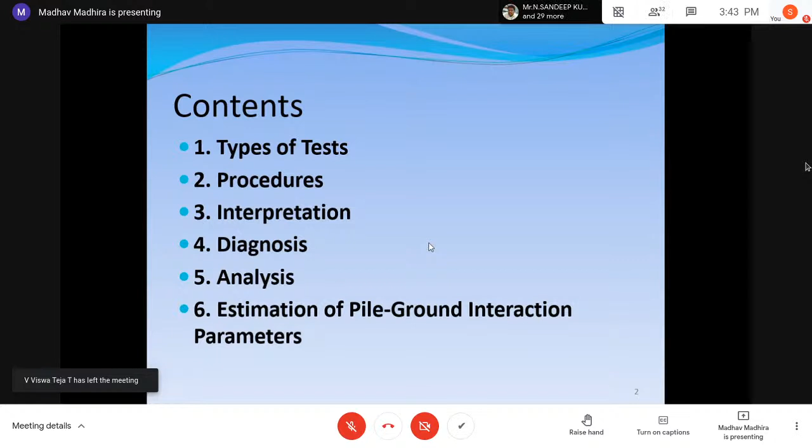What are the types of tests we have? What are the procedures? More importantly, interpretation - following that you can diagnose what's happening in terms of the response of the pile from the load settlement data. Then we can analyze and get back some ground interaction parameters too. There's a variety of things you can get - don't think pile load test is simply to confirm allowable pile load. It's not fully complete in that respect. We'll try to cover many of these aspects, and I'd like you to share anything you want. At the end of the presentation, send a note or message and we can reply.

The kind of tests we do on a vertical pile are axial compression, which is the most common one, wherein you would like to know what is the maximum load it can take and what will be the allowable settlement at the usual working load condition.

Then, of course, you do the design. Basically, why we need the test is because when you design a pile, for example even 0.6 meter, 12 to 14 meters long, it goes through several soil strata, and we hardly know any information. Maybe we'll have some SPT N values, if you're very good you can probably have static cone QC, and some people try to get the so-called undisturbed sample. We know in India our sampling is not all that perfect, and so we end up getting some very unrepresentative values.

So based on that, we try to design saying that the allowable load for the pile is 90 tons, or 900 kN, or 800 kN. For us to accept the design, you need to verify, and that is why we go through this axial compression test.

Similarly, when we have a building or a tower, instead of compression you may have a pull-out, which means because of either wind load or lateral loads or whatever may be the reason, could be uneven ones, the pile can be subjected to an uplift or upward force. We call it pull-out load.

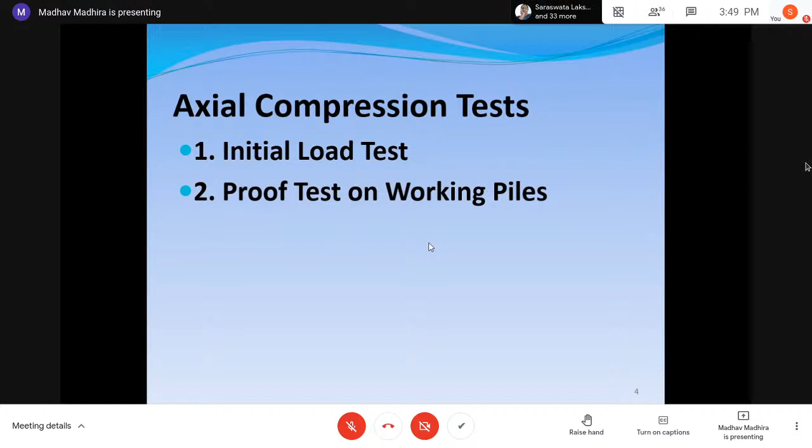So what we do is in these 50, 100, 200 piles, we choose 1, 2 or 3 working piles and test them for 1.5 times the design load. That will give you confidence that we are going to get a safe design, which is rational and appropriate for our project, because you don't want any pile to fail. Please remember, piles are very expensive. I believe the cost is somewhere around 1,000 to 10,000 rupees per meter. So when you're investing so much money in the foundation, and the performance of the superstructure depends on the performance of the piles, you better invest some money in making sure the whole thing will work well.

Then how do we load these piles in terms of compression? What we have is what they call kentledge, which is nothing but dead load. You make sure all the load is initially placed and transferred away from the pile, and you can then take the reaction through a jack from the kentledge. The second alternative would be you can drive piles around and use them to take reaction. Sometimes we do it out of the existing ones in a big pile group, but for an initial pile load test, I don't think it will be possible because we don't have too many piles around to take reaction from there.

The third possibility would be you can drive anchors into the ground, which means you have to go fairly deep, maybe 10, 15, 20, 30 meters, so that the anchor gives you the load from which you can take the reaction. Out of these, the most common ones are the kentledge and reaction piles. Occasionally, you do get the anchors.

Then in terms of the test, we do two types. Basically, what's called a maintained load test, which means the load is kept for some time. There are two ways in which you can keep the load: slow test, which means you wait for the deformations to become reasonably constant over a period of time, maybe half an hour, 45 minutes, 1 hour, etc., and then go to the next stage. Some people say they can't wait for it, so then they do a quick maintained load test, where the load is kept only for a short period of 10, 15 minutes, and then the next load is applied. The interpretation in each case is very different, and let me tell you, the deformations are more in case it's a slow maintained load test.

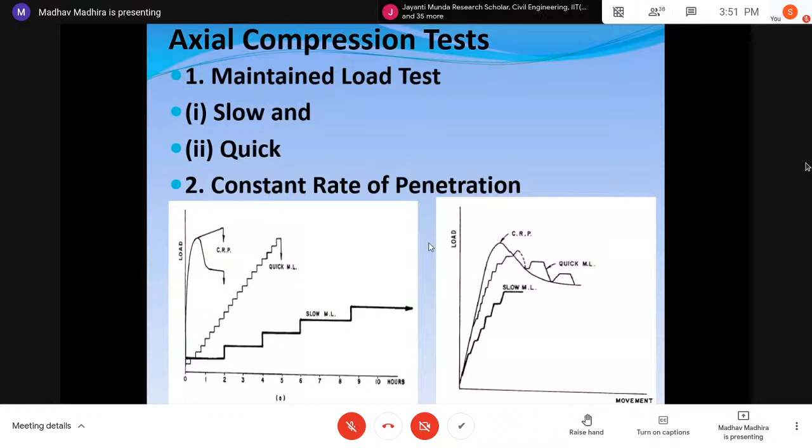Constant rate of penetration is where you push the pile with some kind of mechanism at a rate of, say, a few millimeters per minute. Again, this is not a very common thing, but some people have tried it. Basically, I would say most of our tests are slow maintained load tests. These are the kind of schematics you have for the types of loading.

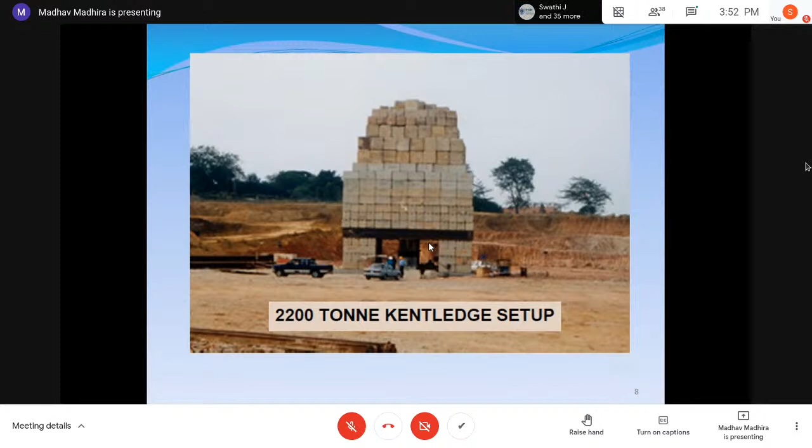Let me tell you, it's very, very expensive to do a static pile load test. It may run into a few hundred thousand rupees, etc. This is one particular case where they had a 2,200 ton kentledge setup, and you can see the blocks, cement concrete blocks, they had to pile them up so high to get the required load. Obviously, in this case, the pile capacity would be definitely 300 to 500 tons at least, so that they can get it.

What we do in India is, of course, not always getting the concrete blocks. We sometimes use sandbags, which you have to pile up. Because each bag is hardly about 50 kilos, you need a large number. There are instances where we used something like 1,000 to 1,500 sandbags, and that led to problems because the height of the loading increases, and with increased height, the chance of instability is very high too. Taking them up is not easy, so you have to do all kinds of things.

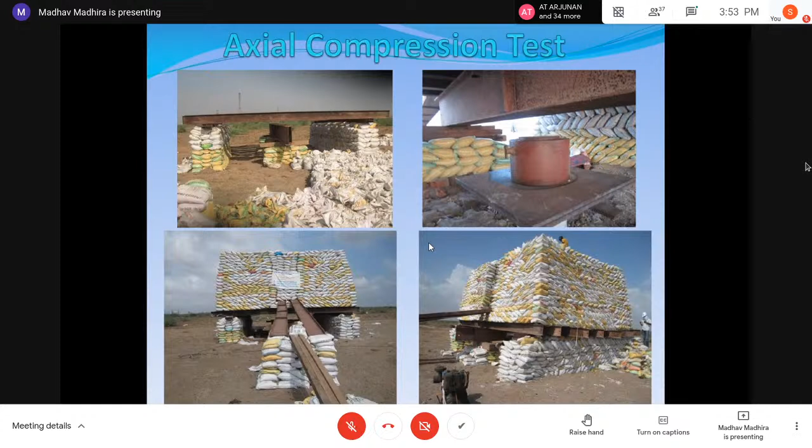I don't know whether I should say this, but in my experience, please pardon me in case I violate some professional norm: some contractors do preloading the previous night if you are not careful. So what you see on the day of testing is a preloaded pile. Don't leave the jack without attention. I want to warn you that this is very important. Whenever we did pile load tests in IIT Kanpur, we had our own watchman there to make sure there was no loading done in the night. I know one of my colleagues who left a company because he was asked to do this. He said, I won't do it. And they blamed him, saying his load tests were giving very small allowable loads, whereas someone else was giving much larger values, the reason being the other person was loading it the previous night.

Then we had to measure the displacement, the jack of course gives the load. When measuring displacement, please note that the support system for the dial gauge has to be kept fairly far, otherwise the effect of the loading on the pile will cause displacement of the support for the dial gauges too. I'll show you some more pictures of this.

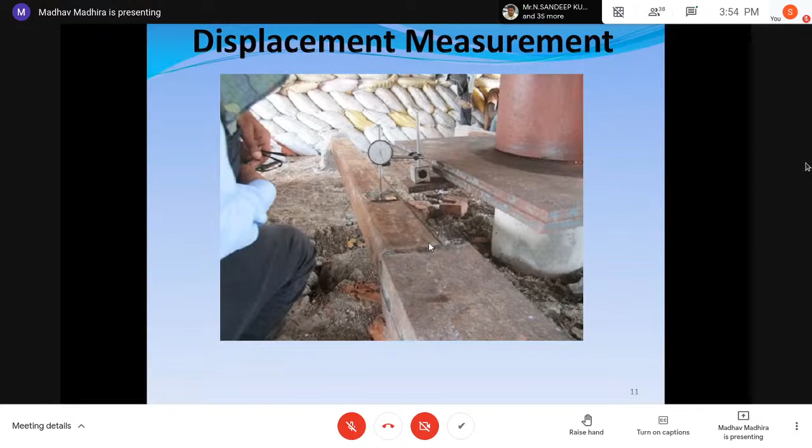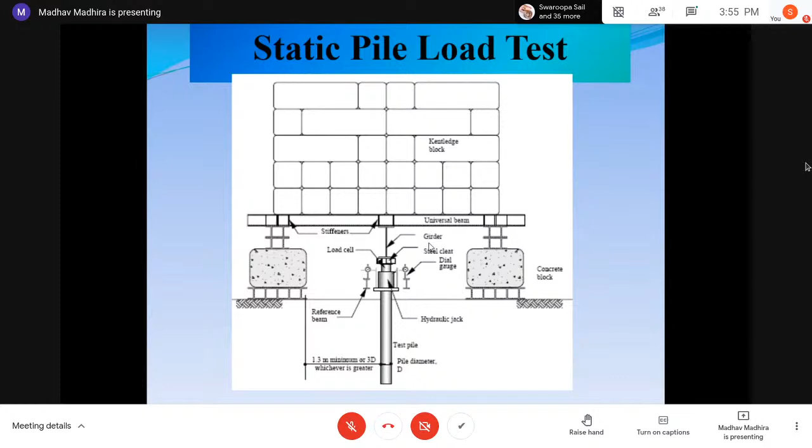Don't take just one reading, you should have at least two, so that in case the pile has a differential movement from east to west or north to south, you'll be able to find that out. One dial gauge, in my opinion, is not good enough. You need a minimum of two dial gauges.

This is the pile load test again. Basically you can see very heavy sections are needed: a 600 mm diameter pile, a jack with 350 ramp, and two dial gauges on either side.

Again, the details: you can measure the load through either a proving ring or one of those load cells, and you get the load from there, while the dial gauges give you the displacement.

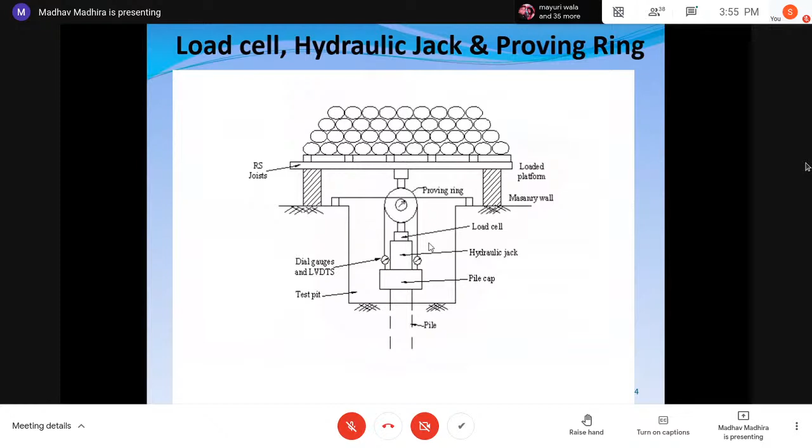This is another schematic, and the jack is loaded by pumping. I would recommend this pump be fairly far from the pile, because I'll show you another reason why instability may lead to problems. If you have a setup where you can put the jack and pump a little far away, it will always be good for you.

This is what I wanted to say: if you want good measurement, please move the support system far away so the dial gauges are not affected. Fortunately, nowadays you can use a total station rather than a dial gauge to measure displacements, and that would be one of the best ways to circumvent the problem of support settlement.

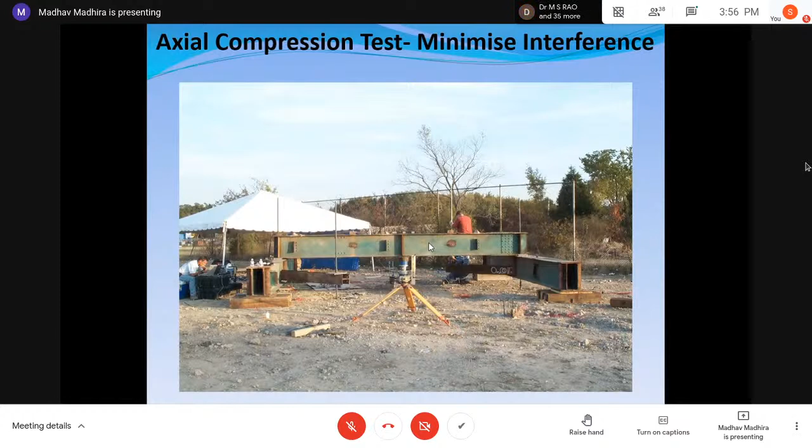If you look at the shaft resistance, it is mobilized at a very small displacement, hardly something like 5 millimeters is enough for the full shaft resistance to be mobilized, whereas the base resistance needs a large displacement, maybe of the order of 10 to 20% of the diameter of the pile. Keep this in mind, because when I talk about interpretation, this will be very useful.

The shaft resistance sometimes, in case of very dense sand, shows a reduction because the ultimate load, or peak load, may be more than the residual one. So you have to be careful with that when you are testing, and when you see a kink in the curve, you realize what's happening. That's how I want you to look at the load displacement graph.

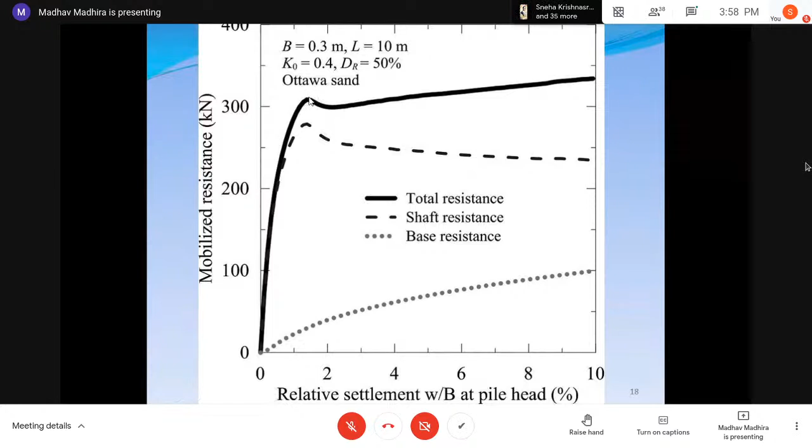Usually what we do is we don't load directly, we use cyclic loading. Let's say I apply the load first to about 200, 300 tons, unload it, go for the next cycle which may be 500, 600 tons, unload it, and then go for the final cycle 3 where you find the required ultimate load. In this particular case, cycle 3 has gone up to 800 tons.

When you look at the displacements on the time-settlement curve, whatever displacement occurs becomes constant under the first cycle. When you unload, we don't get back all the settlement that went in, the rebound is smaller. Under the first cycle, the rebound is fairly significant, with probably very little plastic deformation, about 10%. But under cycle 2 and cycle 3 with high loads, the rebounds are much smaller, which tells you the behavior is going into more plastic state. The pile-soil interaction moves into the elastoplastic range, and that tells you how the ground is behaving.

This is another thing you need to interpret when you are looking at the pile load test. So this is how it looks like.

I want you to look at cycle 1, which has given you almost elastic rebound - I wouldn't say elastic, but hardly about 1 millimeter was the permanent settlement. Under cycle 2, the maximum displacement may be about 10 mm, but rebound is only 5 to 6 mm. In cycle 3, the maximum displacement is something like 22 mm, but the rebound is more, about 10 mm. So you can see the behavior of the pile is different under different loads - this is how you can evaluate the elastoplastic nature of the pile.

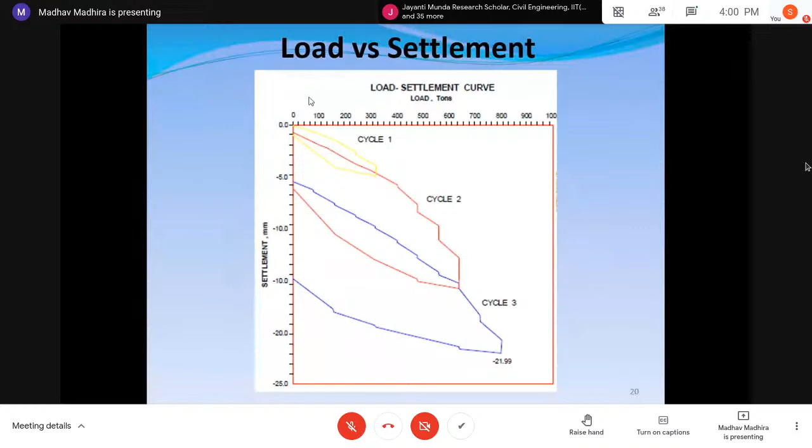We also like to find out if it's possible to measure the load in the pile, so that we can know how the load is getting transmitted to the bottom. I'll come back to this in more detail later, but in refined testing where people want to know the load transfer, all you need to do is provide strain gauges embedded in the pile itself. From the strain gauge I can get the strain, from the strain I can get the stress, and from there the load.

You realize that in all these cases, the shaft load is mobilized first, and the base load is the last to be mobilized. So you can say it's a top-to-bottom load flow - if you think in terms of seepage, the load is the one that is getting transferred slowly to the bottom. You have to see if it's possible to measure this kind of load transfer too.

You can also have a lot of instrumentation and find out, if possible, the toe displacement too. It's a very simple device - all you have to do is provide another telltale at the bottom. Some agencies measure not only the top displacement but also the bottom displacement through another device, so you know how much punching takes place at the toe into the base layers. This is another way to get more understanding of pile behavior.

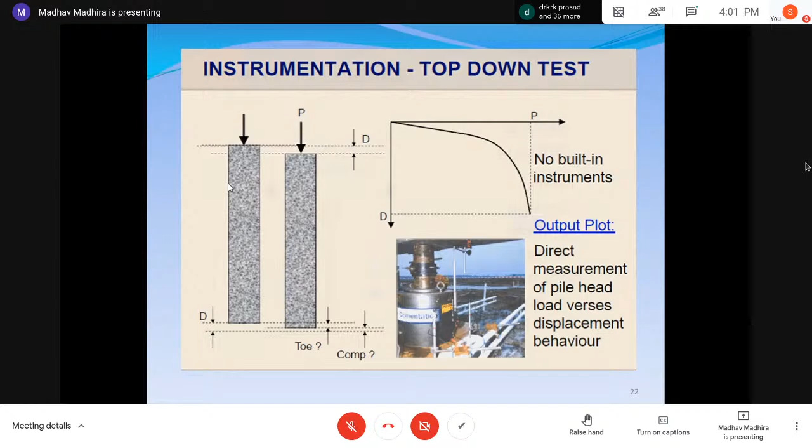I want you to now realize the interaction between dead load transfer through the Kentledge. Suppose if I have the pedestals close to the pile and the Kentledge is loaded as it is, the surface footings through which the Kentledge dead load is transferring 500, 600 tons to the soil means the soil below the foundation footings is going down, which will try to subject the pile to down drag. I want you to understand this because the implications of testing are important.

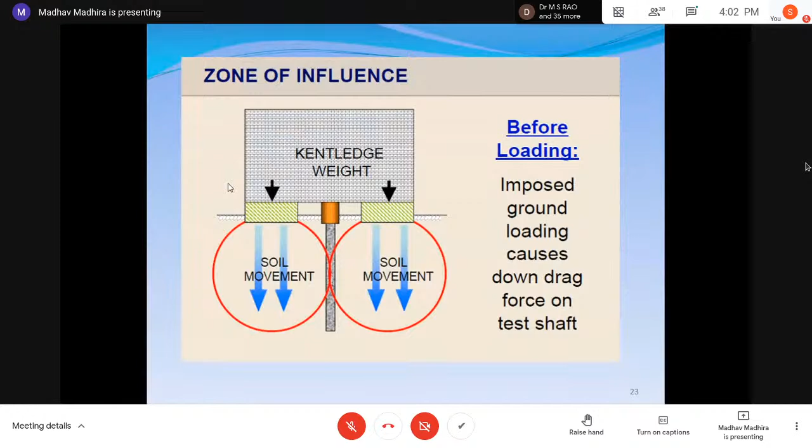If the spacing is large, this down drag will be less. But if the spacing between the two footings on the surface is small, this is what happens. You can see the pile is initially, even before you load it, subjected to down drag because the soil around the pile is trying to go down on either side.

Now, during loading, what's happening is you're pushing the pile. So the pile is trying to go down and the load is being transferred to the pile. So the load on the footings is reduced, and the soil tries to move up. We need to analyze again, in case of interference, what is happening to the pile. So whatever you think you're testing may not be true. It's because of a combination of down drag before loading and the reverse of that during loading of the pile.

So please remember, you have to be very careful to keep these kentledge supports very far from the pile. The reaction piles are put in all around, and then you can see the piles in between these four stanchions, and from there you connect a girder and take it.

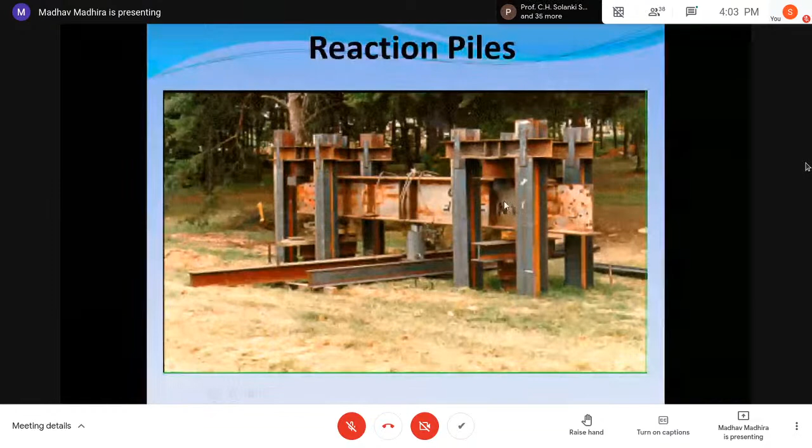We also have a very similar problem with reaction piles too. So when I have these reaction piles, if they're far, there's no problem. If they're close, we have a problem. This is schematic basically. I have the two piles far away, at least 2 to 3 meters, or at minimum at least 3 diameters away. That should be the minimum criterion. And then you install the piles on either side from which you can take reaction.

When I take compression for the pile here, the other two piles will be subjected to tension or pull-out. That's why we call them reaction piles. So please note that the minimum distance is at least 2 meters or 3 diameters, preferably both.

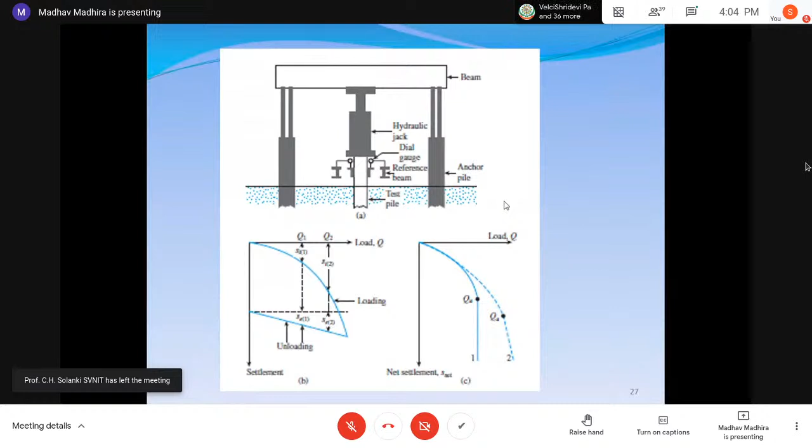And this is how you can say, in terms of the load displacement response, very similar to kentledge 1, 2. You have a hydraulic jack which is taking reaction. We have a reference beam from which we measure displacements too. And this is what I would like you to again look at in terms of interaction.

If the piles are too close, the zone of interaction with the anchor piles or reaction piles will affect the performance of the pile itself. So your test pile may be subjected to the effect of the adjacent piles. Whenever we do the group analysis, we have to consider this. One pile is in compression, the other two are in tension. So you have to analyze, assuming how much of load and displacement are affected by this.

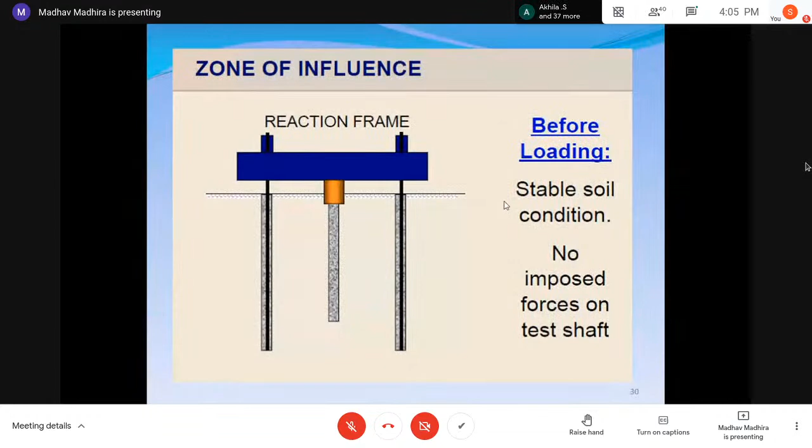So this is the same thing as earlier. Before loading, there's no imposed load on the test shaft. But once you do the test reaction, please look at the soil movements. The reaction piles will try to move up, which means they try to pull the pile up. So the net movement you get will be due to compression under the load of the pile and possible upward drag force from the surrounding shaft.

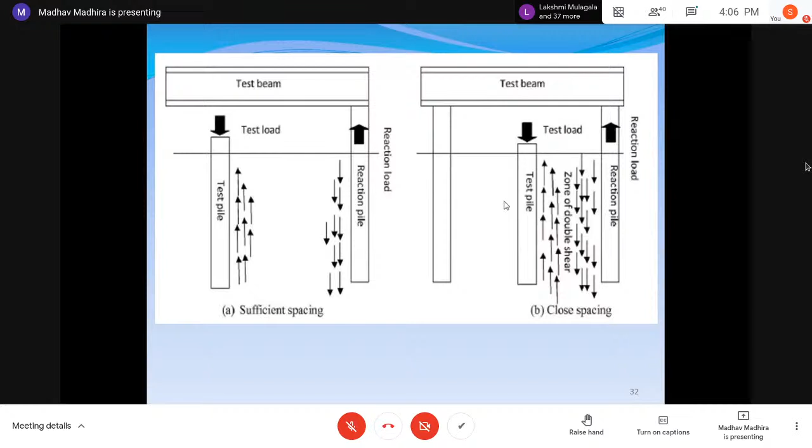This is schematic. If I have sufficient distance between the test pile and the reaction pile, I don't expect any interaction or interference. But if you have close spacing, you can see the pull-out effect that you get on the test pile. The reaction pile is trying to move up, so the soil is trying to move it down, pull it down, and Newton's third law tells you the test pile is subjected to soil which is trying to move up. So please remember, it's not that simple to do this.

Now, there is another very interesting test which was developed recently. They were saying, why should I test the whole depth of the soft soil? If there is a bearing stratum at some stage, can I do a sort of plug test? So what they recommend is, instead of having a pile which will run into the soft stratum that hardly gives you any shaft resistance, they put in a collar with a casing, and then they grout a plug in the bearing stratum.

So this I can call a partial or short length pile, which is only in the bearing stratum. I'm not interested in the response of the soft strata, which is not going to cause any load, which will not take any load. So please remember, this is another alternative you can have in case you want to concentrate only on the bearing stratum.

This is valid particularly in our many coastal areas. The top 5-10 meters is extremely soft. The undrained strength of the soil is maybe 10 to 15 kPa, whereas most of the load I get is from the bearing stratum, which is probably 10, 12, 13 meters. It could be a stiff clay, a dense sand, or whatever combination you have.

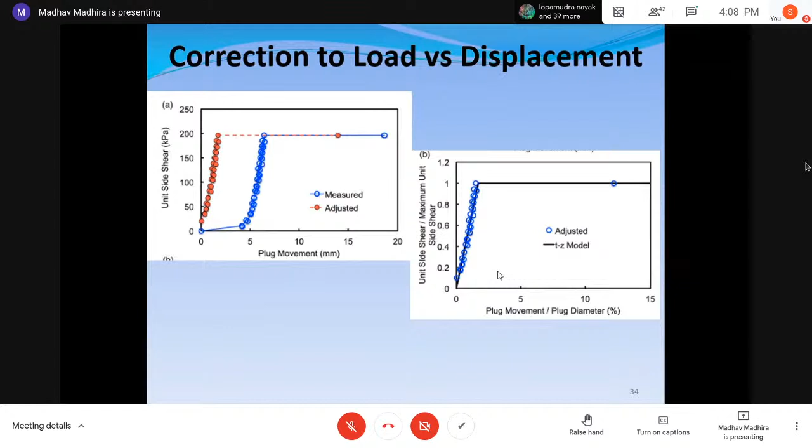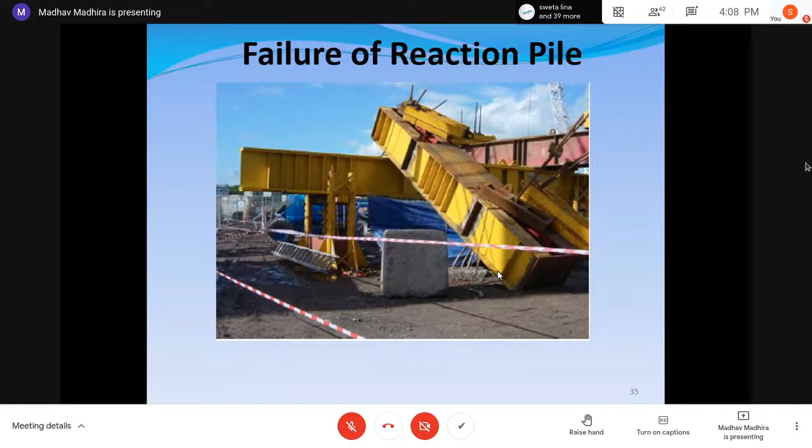Now this is what I wanted to tell you. If you are not very careful with your arrangements, the whole thing may collapse. That is why the jack and the person who is taking the reading should be very far apart. We had 1 or 2 such accidents while I was at IIT Kanpur, so it's not something fictitious.

This is particularly true for Kentledge too. In one particular case, I was there and my lab assistant managed to jump out of it. Because of the very high Kentledge, it becomes very unstable if it is not properly loaded.

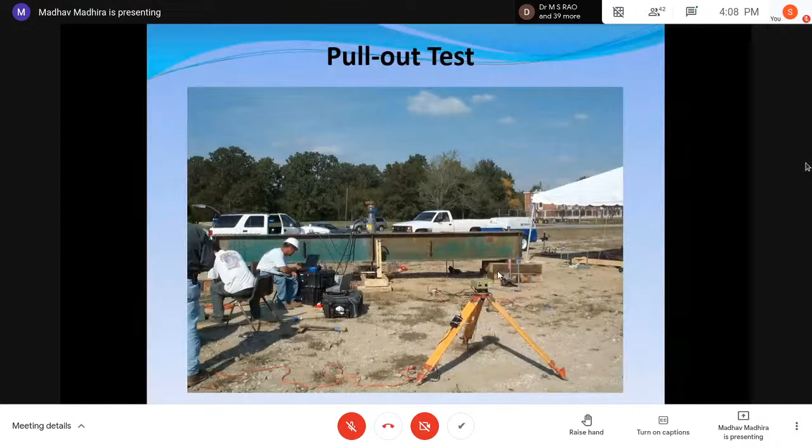When you do a pull-out test, it's much easier because you connect the girder to the adjacent piles and the jack is pulling it out. So the reaction piles are under compression and the test pile is under pull-out. You can see the jack is above the girder and the two strips are going to the pile and attached there. So when the jack is pushing it up, the test pile goes up too. This is how you do the pull-out test.

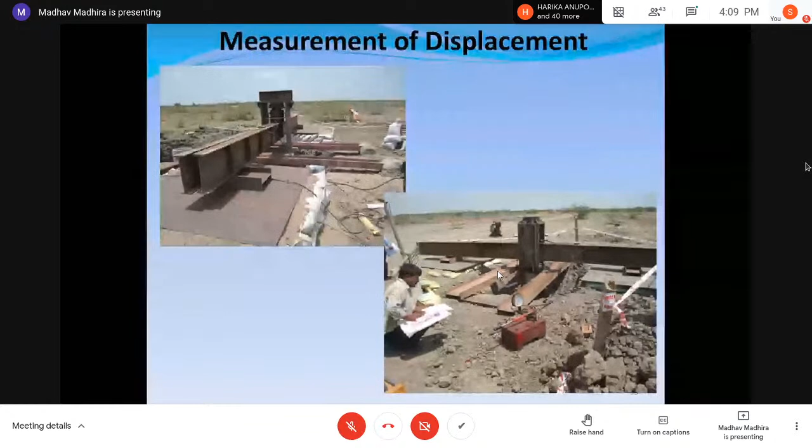When you have a lateral load test, we have a little more complexity. Most of the piles we have, when we test it, we don't have any pile cap. So what we are testing most of the time is a free head pile, which means when you apply the lateral load, the pile head can displace and rotate.

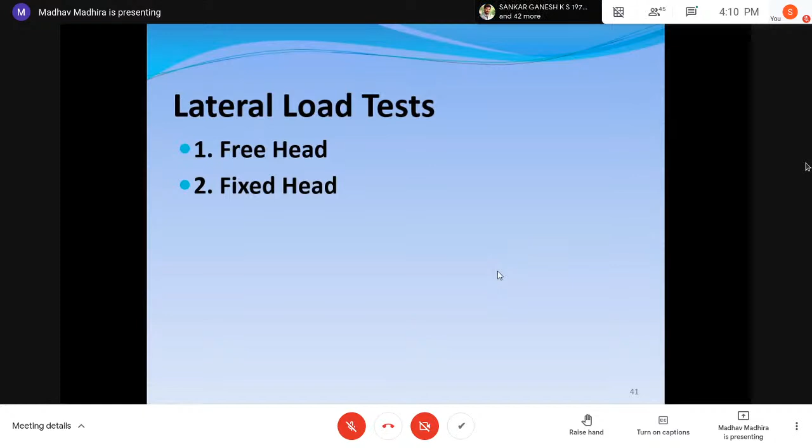Now this is a very strange thing - in all our testing we think free head pile, but in practice there's nothing like a free head pile. Most piles are embedded in a pile cap and pile raft, which means the head of the pile is fixed. The response of the free head pile is different from the fixed head pile. So in case you want to improve it, you have to cast the pile in a huge concrete block to make it fixed head. So when you do the lateral test, be careful how you get the kind of thing.

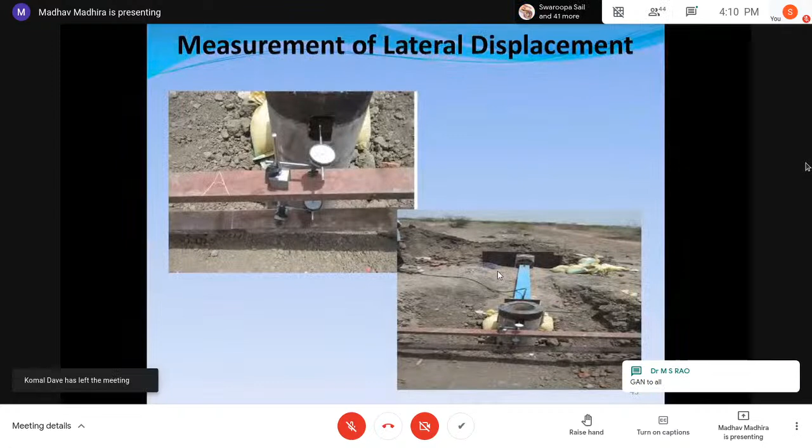Lateral load testing is relatively easy in one respect - I don't need a dead load, I can use the neighboring pile itself. I take a reaction from the adjacent pile, put the load, and take the reading. This is how we measure the displacement laterally - put the dial gauge, and the pile movement can easily be measured.

You can also do a two-way test, in the sense that I can get the response of both piles simultaneously, or I can do a cyclic one, in terms of load-unload, very easily. So the testing for lateral load is much easier. Here you can see they're all free head piles, there's no pile cap. When you interpret and design it, you have to convert the response from a free head pile to that of a fixed head pile.

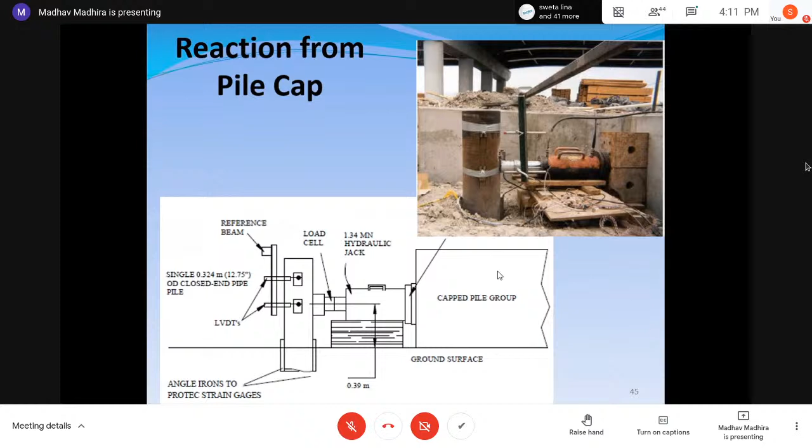So often what we do is either use two piles, or if you have a pile cap, best is to take the reaction from the pile cap itself. The fortunate part is that while the compression load can be of the order of 100, 200, 300 tons, the lateral capacity is smaller, maybe hardly 1/10 of that. So the reaction you need is very, very small, and we can use a pile group which is already existing - from there you take the reaction and get the load tested.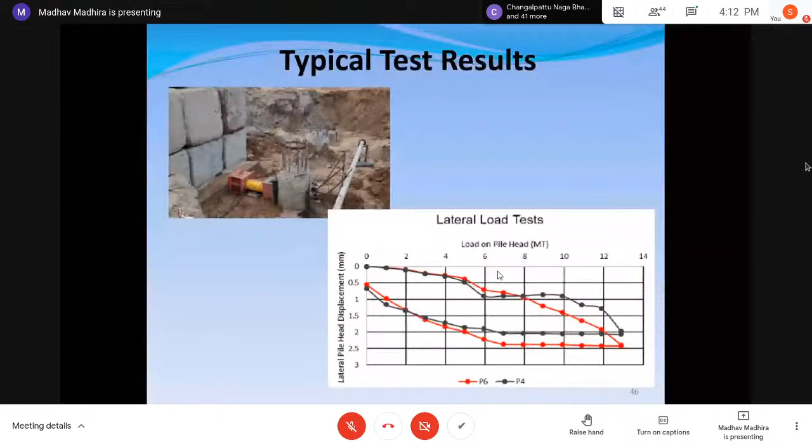And part of it is only about half to 0.7 millimeters in the permanent settlement in this case - a very small load. However, please remember, when you have lateral load, the problem of separation is a very serious one if your pile is going to be subjected to cyclic lateral loads.

The pile will move, let's say, to the right, in which case there will be a gap between the soil and the pile on the left, and it can happen on both sides. Eventually, this separation may extend a little deeper, so when designing for lateral load, be sure how to interpret it if you're going to have cyclic loading. It could be due to wind, seismic activity, water load, whatever it is.

I would say the best thing that happened in recent years, and fortunately for us in India for the last 5-6 years, we have this Osterberg or O-cell test. What they do is forget about your tension threads, anchor piles, etc. Take a jack, put it right at the bottom of the pile, and cast it. Of course, it's a bit of cost - you are going to lose the jack. Once the pile is cast, you can't reuse it anymore.

And we put it and cast the pile, and then this O-cell is loaded. What happens is the bottom of the pile gets loaded in compression, and the shaft gets pulled up. So simultaneously, you are testing both, and there's no need for any extra reaction to be built in. So we have this kind of thing.

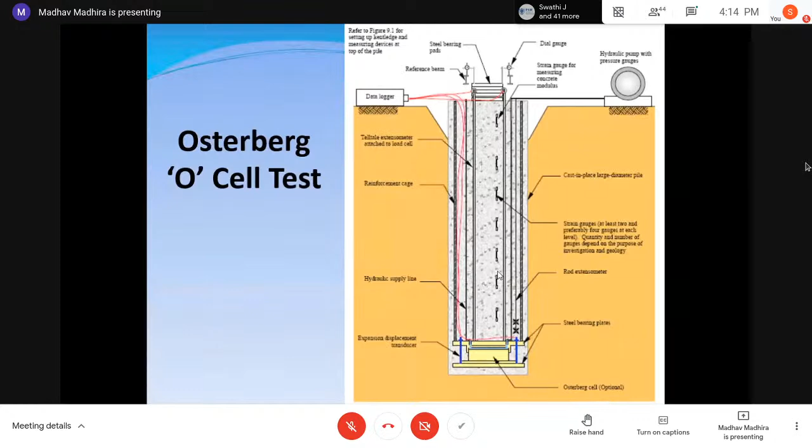So the soil at the bottom is under compression, and the shaft above the jack is under load. Now the O-cell can be at the bottom - this is how it is, you can see the detail here. And of course, you need a pipe to jack it up and measure the displacement, etc. These all come with the usual setup too.

Some of the Osterberg cells are also embedded at the center. The advantage with this is that you get compression and shaft resistance below, and shaft resistance above. But the only problem is the amount of shaft resistance you get on the pile above that length is limited, so you may not be able to load it as much as you want. For very deep, long piles, this is okay.

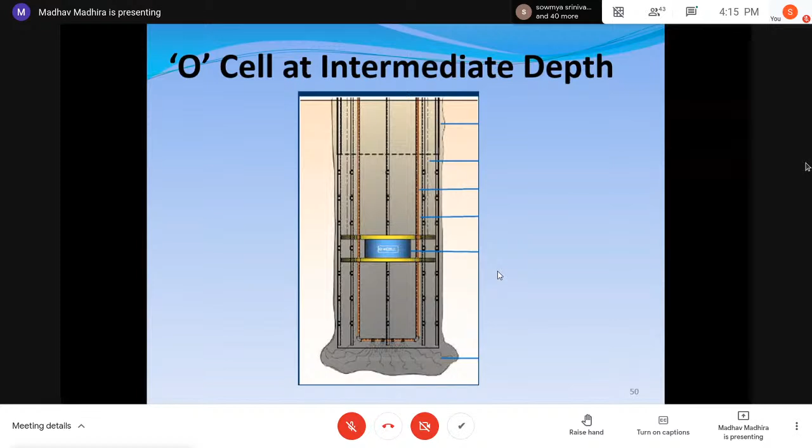So this is the schematic. Before loading, it's an absolutely stable condition, with no imposed load on the shaft or the base. And during loading, again, no external loading. What you can see is the shaft above the jack is subjected to an upward force, and the pile below the jack is subjected to a downward force. So basically, you can find the variation of the load.

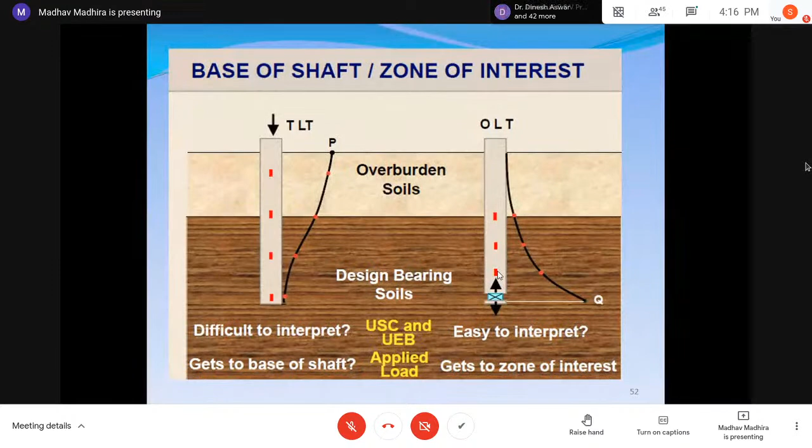And here again, I would like you to compare with the standard test with kentledge. The load is applied at the top, so the load flows from top to bottom - the maximum load is at the top and the minimum is at the tip. Whereas in the case of the Osterberg cell, it's exactly the opposite: the maximum load is at the tip and the minimum load is at the top. But in terms of interference, zone of influence, there is none. So it's much easier to analyze an O-cell test, as you can see here.

And in case you have something in between the two, you can modify your analysis to determine where you want the shear to be mobilized, depending on how you do that. So these are some of the most powerful tests that we have available.

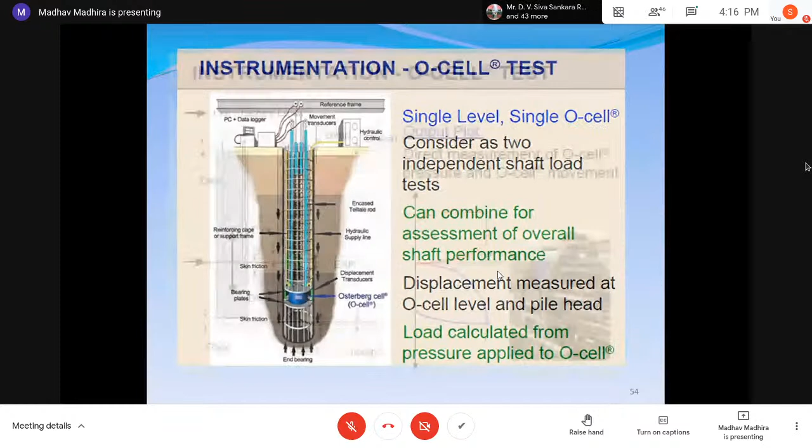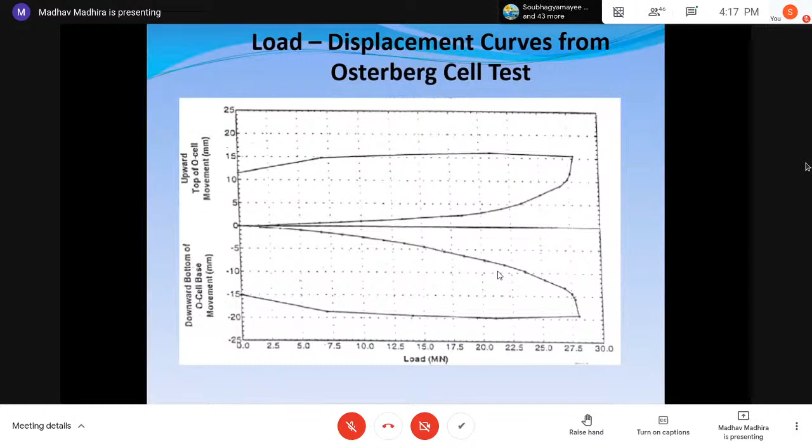So you get complete behavior from the instrumentation plot, and you know what's happening to the pile in much more detail, neater, quicker. This is how I look at the diagram, and I can immediately find out the upward top movement is probably about 10 millimeters, and I could get a load of 27. So I know the shaft load. If I look at the downward one, I know the length and the total load, very similar behavior, but in terms of displacement, the bottom part is much more than in the upward one.

We can also use strain gauges and get the load displacement response at each level. I'll come back to this a little later in terms of analysis. This, of course, is very expensive, but if you want to study the behavior and find out exactly what's happening in terms of load, you can see how load is transferred at each stage of loading, how much goes to shaft and how much to the base. This gives a better picture.

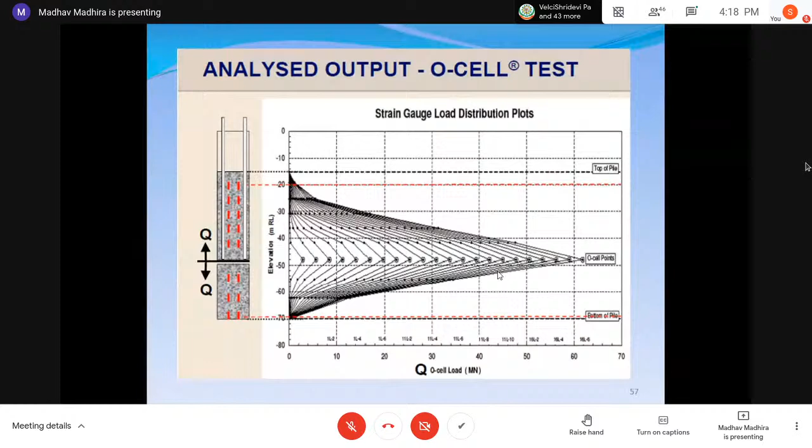Now, I think Dr. Ravikiran Vaidya will talk about the dynamic methods, so I'll just pass through them quickly. We do what's called a simple integrity test. We want to know whether the pile is solid, complete, and proper or not. It's a low strain test, and from there I can get the type of pile, any defects, etc.

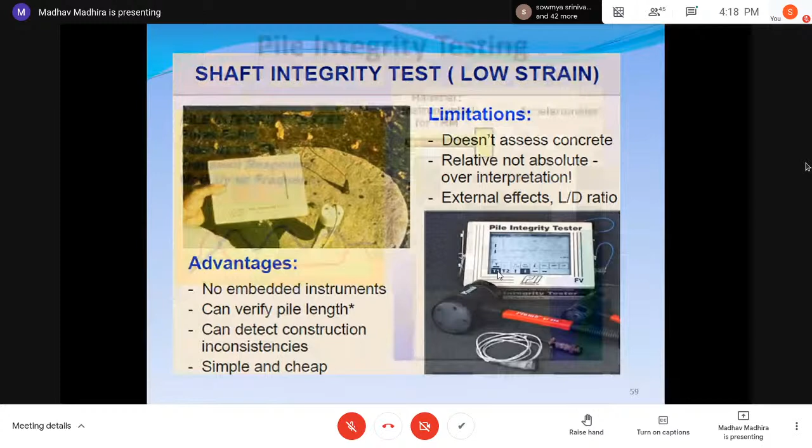From the simple response picture you get, all you do is tap it and measure the response with an accelerometer, and if there is a defect, it immediately shows up. Dr. Vaidya would be the best person to talk about it since he's been doing it. The idea is you can find out if there's a bulge, a necking, a crack, or poor concrete.

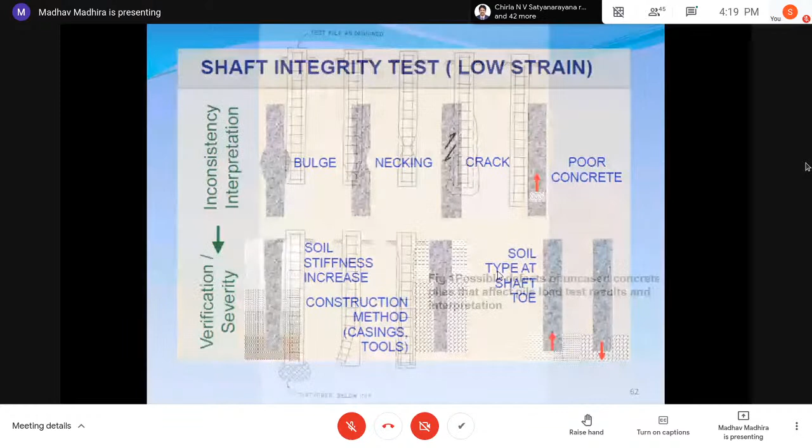I would recommend that if you have a large, good project, go through integrity testing, because the concreting is not always perfect. The people at the site may not always be as efficient or as expected. So it's always good to find out what possible defects there are, and this pile integrity testing is much less expensive. You can do that.

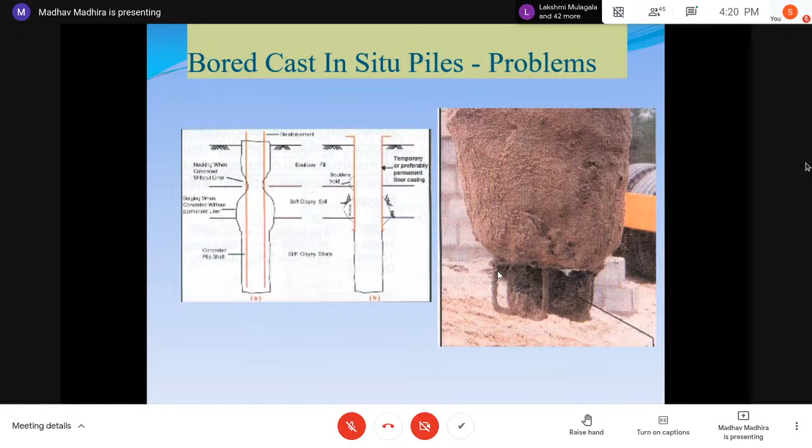I'm aware of two or three problem layers. If there's a soft clay layer somewhere, bulging suddenly takes place, as you can see on the left, and then you may not have concrete in the bulge too. There are also cases where, with bored cast-in-situ piles, the bottom is not properly concreted. These are the defects you can easily find.

The other method is dynamic pile testing, which is the pile driving analysis. You can find out the capacity without doing a static load test.

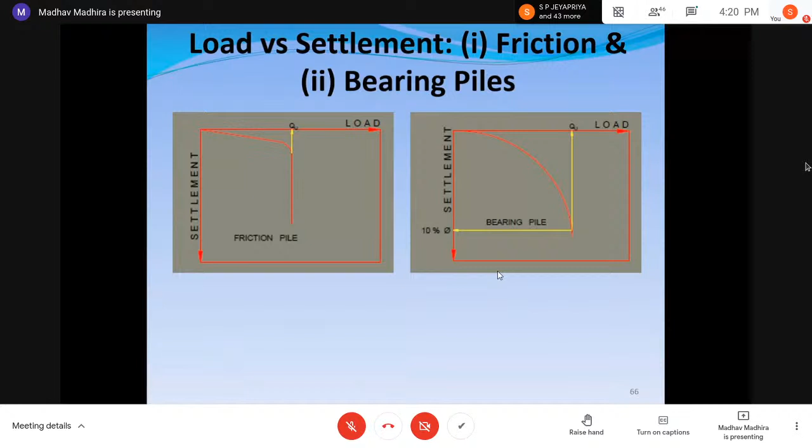Let's come back to our concept again. As I said, the friction aspect, or shaft resistance, needs very small displacement to get full mobilization. Whereas for bearing, you need large displacement - we talk in terms of 10% of the pile diameter. So if I have a 600 mm pile, you'd need to go to 60 millimeters, which is very, very difficult. So we rarely manage to get full mobilization in bearing. Most of the time, we only get the shaft resistance fully mobilized.

In this case, I want you to tell me whether it's all fully shaft or if there's some possibility of end bearing too. As I can see, the total displacement is around 10 to 15 mm, so I'd expect most of the shaft load is mobilized, and some end bearing has taken place. If I look at the curve, it's not yet reaching the ultimate value - it's still not horizontal, meaning the load displacement curve doesn't drop down. That's how I look at it too, and there are different ways to interpret that.

I may not go into detail, but I'd like to say there are several approaches in the literature which address: if you haven't gone to failure, how do you get the ultimate value?

One of the parabolic methods is you take different intercepts, increase them at regular intervals, say 5, 7.5, 10, 12.5, 15 mm displacement, and look at the increment in load. You will realize that asymptotically it will die down, and if you extrapolate the load increments, it will come down. This is one of the earliest methods.

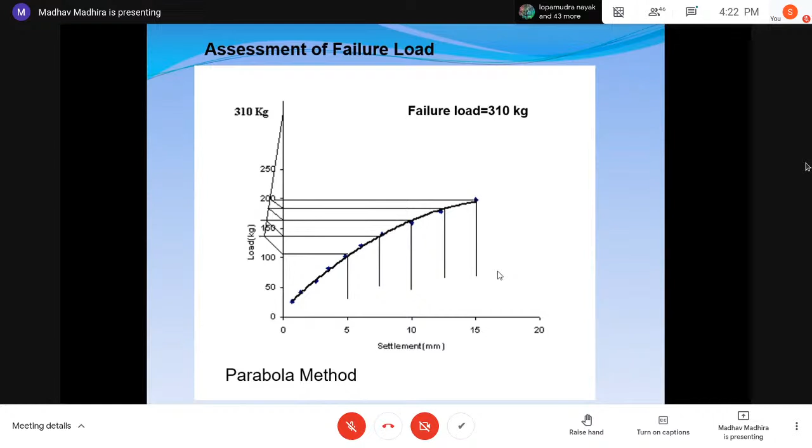People have been using this, like plate load test. You plot the settlement versus load on a log plot where the kink occurs, but honestly this is not the ultimate load. I would say all you get is a change in rate of displacement mobilization with the load. So I'm not very confident or find it useful, this method.

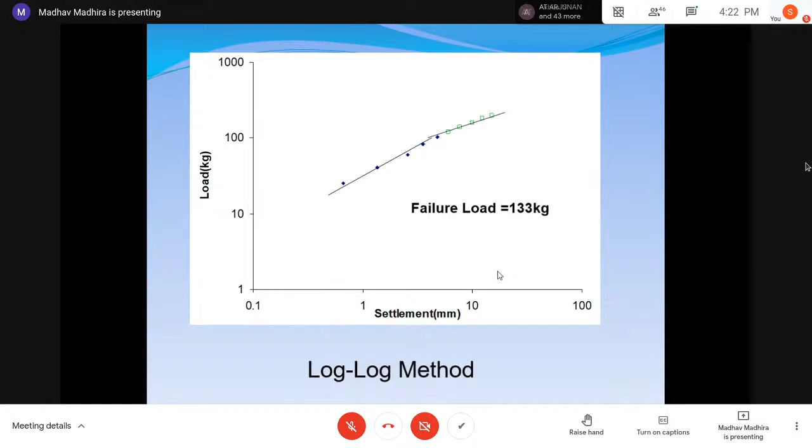This is one of the good methods, given by Chin from Malaysia back in the 70s: the load displacement curve looks like a hyperbola, where you have gradual increase and finally it asymptotically reaches the ultimate value. So he fits a hyperbola, and what we do is plot settlement divided by load versus settlement, and it turns out to be a straight line. The slope of the straight line gives the inverse of the ultimate load, and the intercept at the top basically, if it's linear, lets me calculate the initial slope of the load displacement, or initial pile-soil stiffness. So I can get these two from the hyperbolic or Chin's method, which is very, very common.

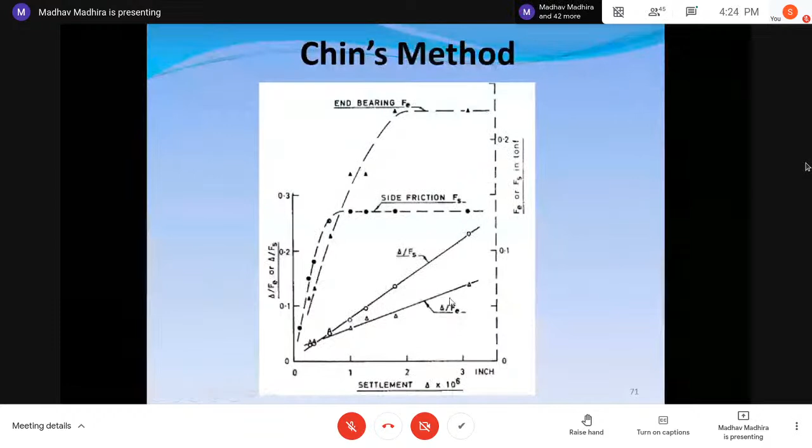If you look at it, if you're able to separate out shaft and base load, I can plot these two separately. This is side friction, and the slope is far higher, which means the inverse of it is less, and the end bearing is much higher, so the slope is smaller. You can easily separate out these two in case you're able to measure, and then use appropriate factors of safety for the design.

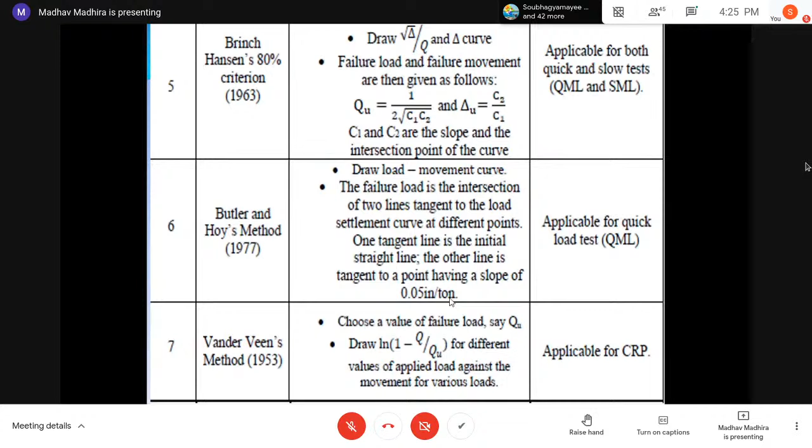So some of these are illustrated through figures. This is how we look at it - the failure criteria: can I go to the ultimate value, or should I stop at 10% diameter of displacement, whatever is the maximum? You can see a kink here which tells me the yield load. Once I get the yield load, the rate of displacement is very high. That's how I look at it.

This is the tangent method - you have the initial tangent and a tangent from the later part to get that intersection.

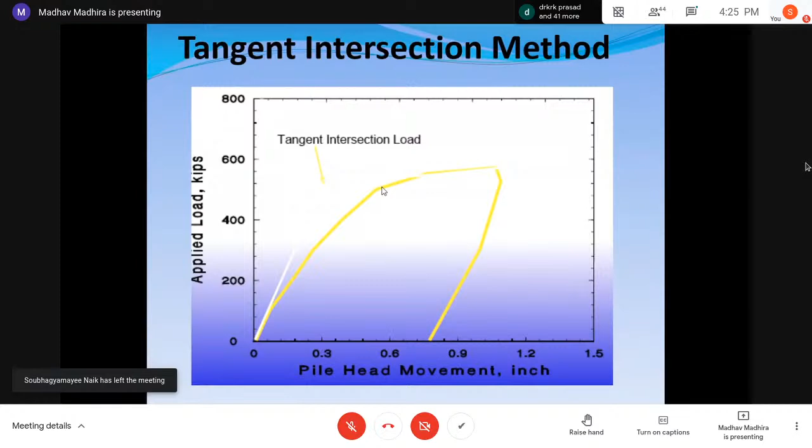Davisson offset method: elastic compression plus D by 120 plus 0.15. He said this is your failure load. That's how we assume and then get the values.

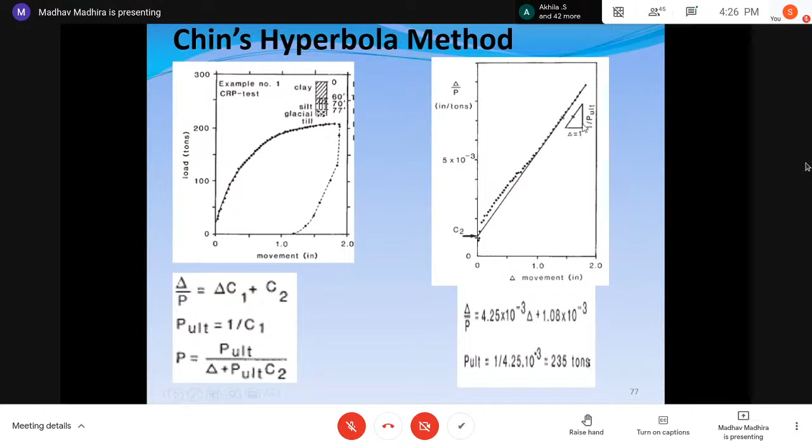Chin's hyperbola - you can look at the actual curve here, which looks like a hyperbola, and we convert that into displacement by load versus the displacement. I fit a straight line, the slope is the inverse of the ultimate load, and C2 gives me the inverse of the initial slope. So I can get both this information. You don't need to go to failure because the hyperbola asymptotically reaches the ultimate value, and this straight line gives me the ultimate load without any problem.

Brinch-Hansen's method is here - we take different percentages of load, extrapolate it, say 80%, and then go to 1.5 times that, and you can get the value.

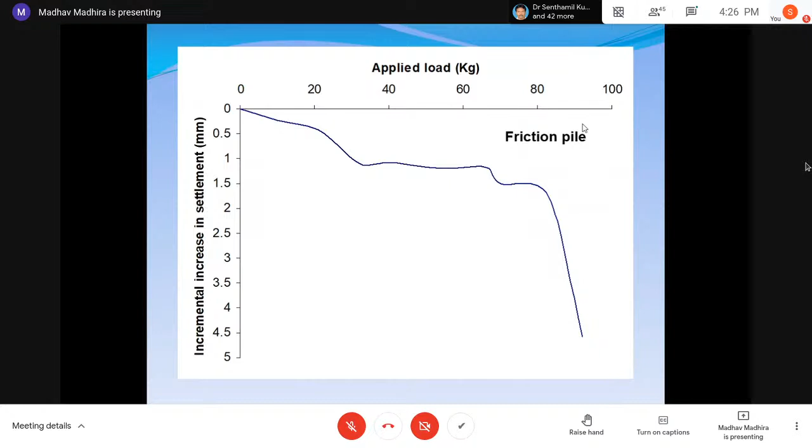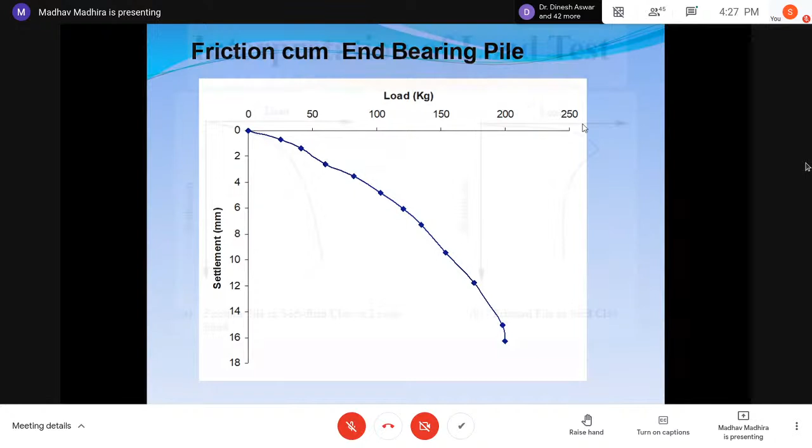This is how I like to interpret it - whenever I have a load-displacement curve, if I see a very sharp drop, I immediately realize it's a friction pile. Whereas this is typical of a friction and end bearing pile, because the displacement goes up to 14, 15, 16 millimeters and we still are not reaching the ultimate load, so then I know it's both types. So when you want to interpret, please look at the load displacement graph and don't just look for the ultimate load or the safe load - try to understand how the pile is responding.

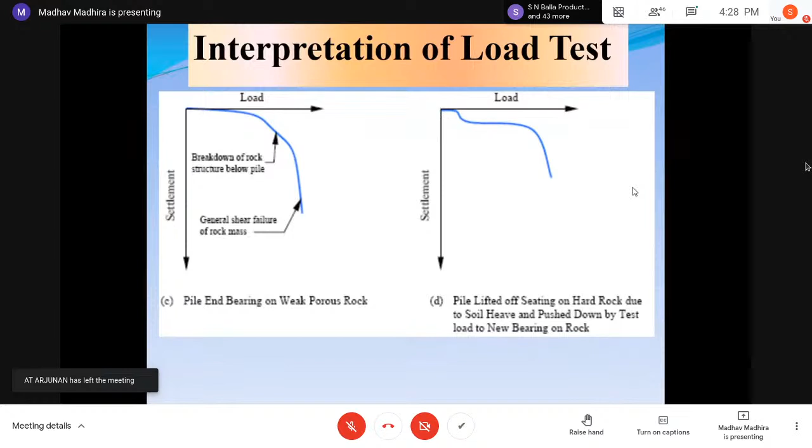Again, similar to this, you can get different kinds of failure. Sometimes if you have a hard drop, the pile gets sort of bounced back because of the end bearing kind of effect.

When you're interpreting, you have this problem: the down drag effect, and groundwater conditions can change. So when you're testing, you need to know what the groundwater level is. If the groundwater level changes, the design has to be corrected accordingly.

When doing bridge foundations, you do a pile load test, but you have to allow for scour. These are possible interpretations too. When you expect scour and don't want the capacity measured during scour conditions, you put in a casing so that the pile goes below the scour depth.

The same thing is true for down drag. If a soft clay is present and will cause down drag, and you only want the load carried by the soil below the soft clay, you put a collar and do the test.

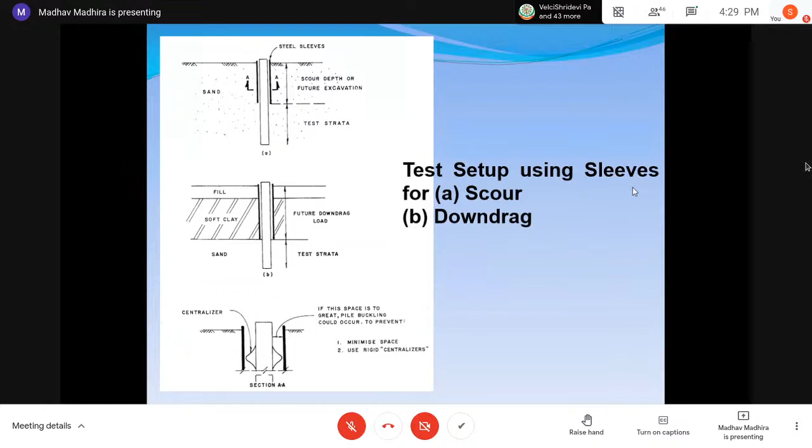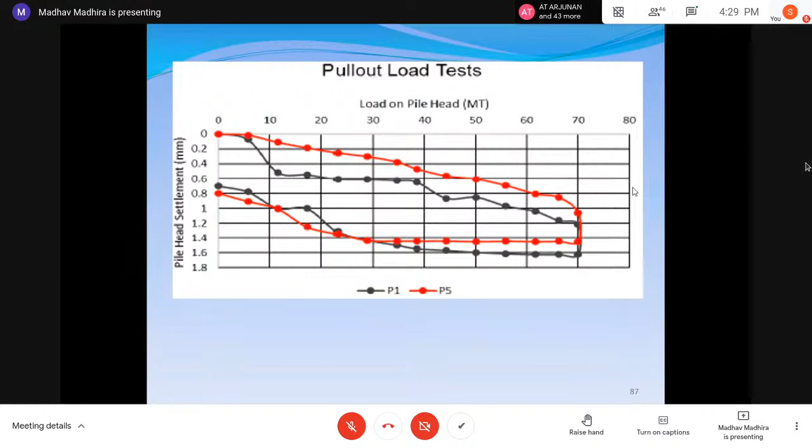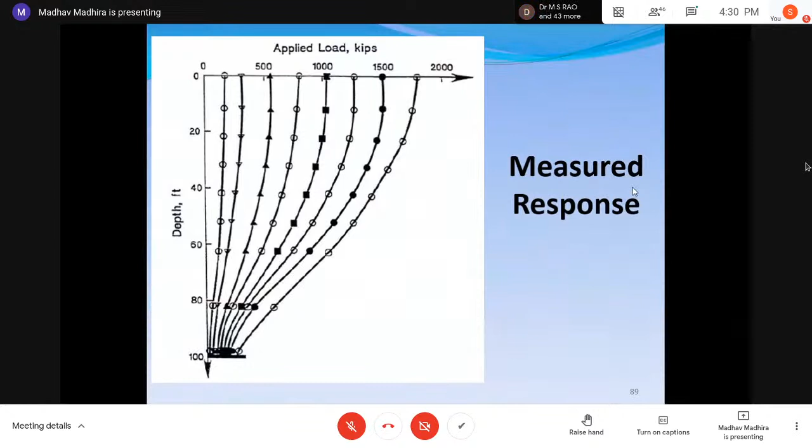Load transfer works as follows: initially, when you apply a small load, very little load goes to the base or even the bottom of the pile. As you increase the load, it gets transferred deeper and deeper, and finally at maximum load, some amount may reach the base. This is how the flow of actual load takes place. Many times we assume all the load goes to the base, but that's not true. Under working conditions, very little load reaches the base if the soil at the top is reasonably stiff.

So how do I take care of it? Is it possible to measure at different depths? There's a simple way: you provide a couple of steel bars within the cage to which you attach strain gauges. These are all embedded, and the strain gauges are properly wrapped. Then you instrument the whole pile within the cage and take the readings.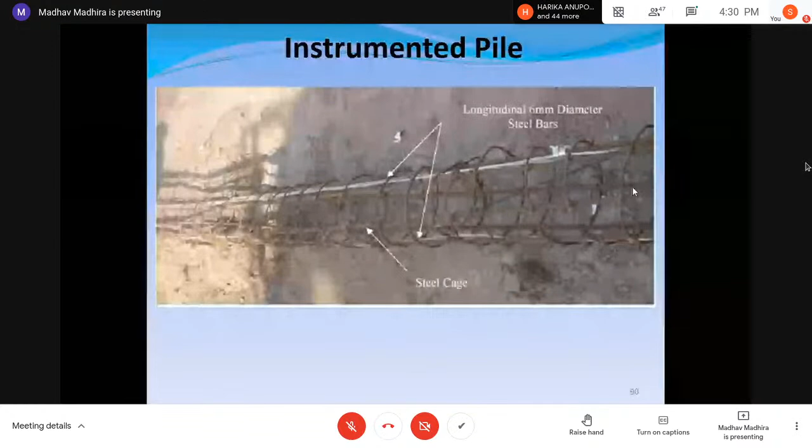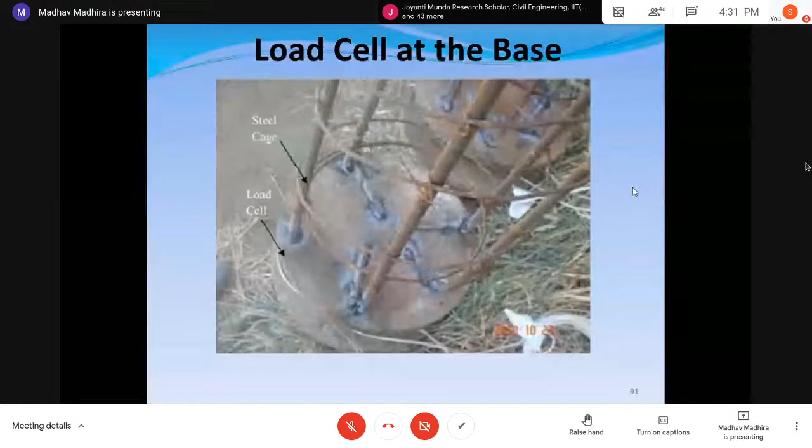You can also put a load cell at the base if you wish, and you get the response from the bottom too. As you can see, this is a load cell at the base.

Very interestingly, I found one case study where several strain gauges were placed at different depths with a load cell at the bottom, and we could get the response of the pile at different depths. As you increase the load, you can find out how the load flows to the bottom. This was very powerful and useful because with this data we could even find out the shaft resistance mobilization as a function of displacement.

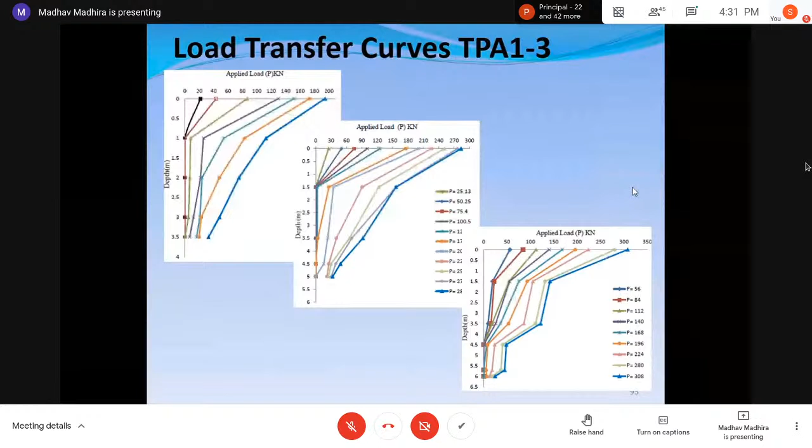This is one of the best cases I have seen, with very short piles, 3 to 5 meters long, where measurements were done at the base and along various depths. Imagine the fortune you have if you can do this kind of testing—it's a little more expensive, but you get very useful data. For these piles, you can see how much load is transferred between, say, 0 to 1 meter, 1 to 2 meters, etc.

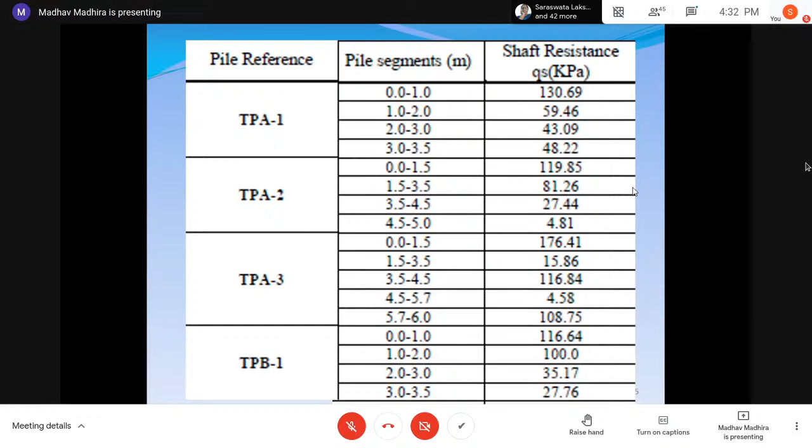This is one of the very useful test data we got somewhere. These are the summary of all the tests: 600 mm, 400 mm diameter piles, different lengths, etc.

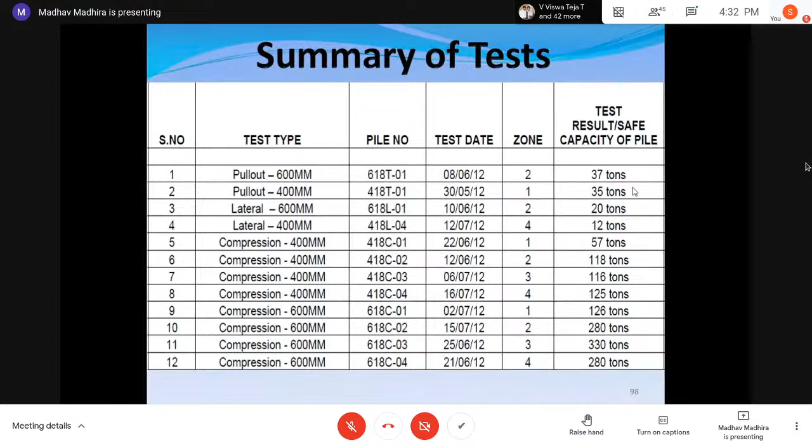This is another pull-out test we had, where you can see how the displacement is taking place. The rebound tells me what the net plastic deformation is, because once you remove the load, the elastic rebound of the pile is more, and the net plastic settlement is due to that of the soil. So we can work out the two components - the rebound gives me, out of the total displacement, what is the net displacement due to the soil.

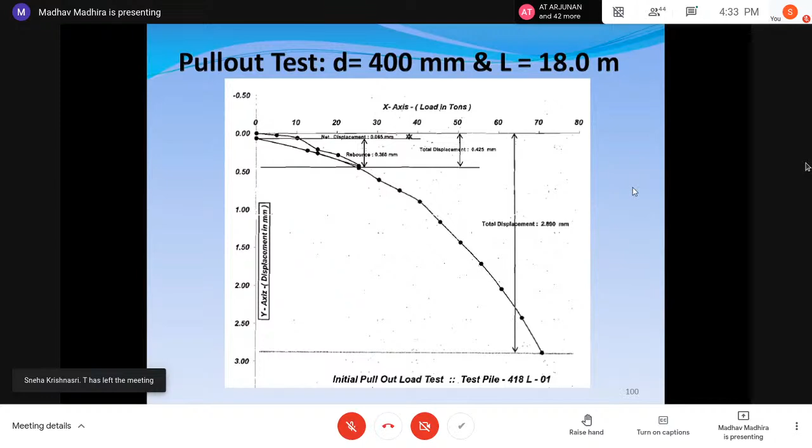For different lengths, we have the data from actual load tests, lateral load tests, and you get very useful data from there. Now this is another typical case we got - you can see the test pile.

Immediately I realized the way the load-settlement drops down after 5 millimeters, you can say there's hardly any base load at all. Even though it's an 18 meter long pile, the base resistance is negligible. Which means there is a gap at the bottom, or the concreting hasn't been done very well.

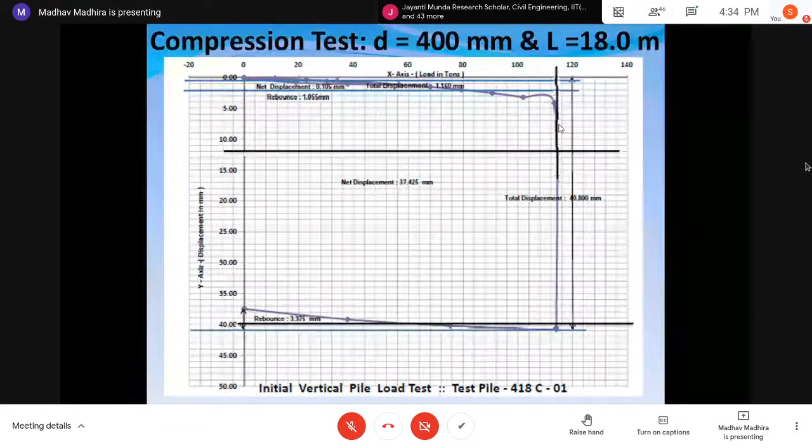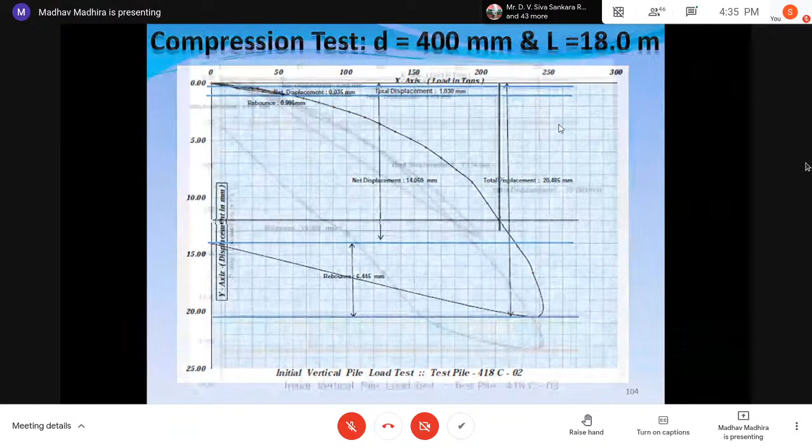This is a compression test, 400 mm, 18 meters. Initially it looks very linear, but once you go to the second load, you get a much larger one. Most of the time people try to stop at 12 mm to 15 mm displacement for convenience in terms of load - they may not be able to generate too much load. So in this case, it's about 200 tons.

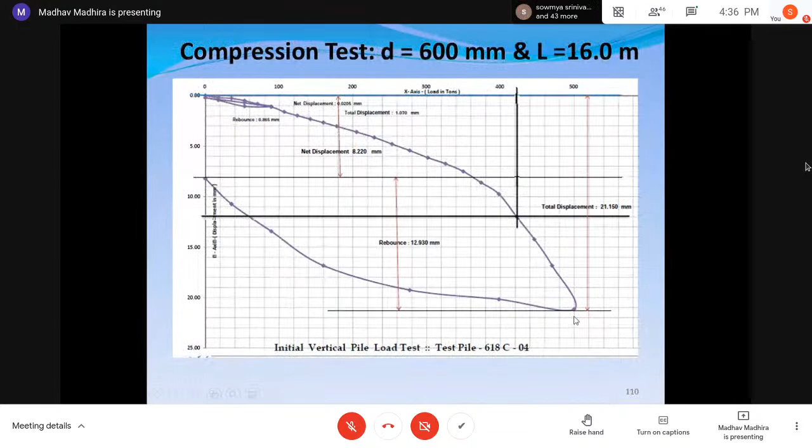There's a small load cycle here and large displacement. Now what we try to do in these cases - one of my students came out with a simple model. We represent the shaft and base by means of a simple nonlinear Winkler type model. If I look at the total pile response, this is the hyperbolic response - the initial load displacement slope is Kp, the coefficient of pile-soil displacement, and P ultimate is the maximum load.

Whereas in the case of shaft load, the initial slope is defined as the spring constant, or modulus of shear stiffness, K tau, and the shaft resistance is tau max. For the base, I put it as Kb, and this is the ultimate base load. So we made simple assumptions with regard to the mobilization of shaft and base load through Winkler springs, and then we combine them to get the overall response.

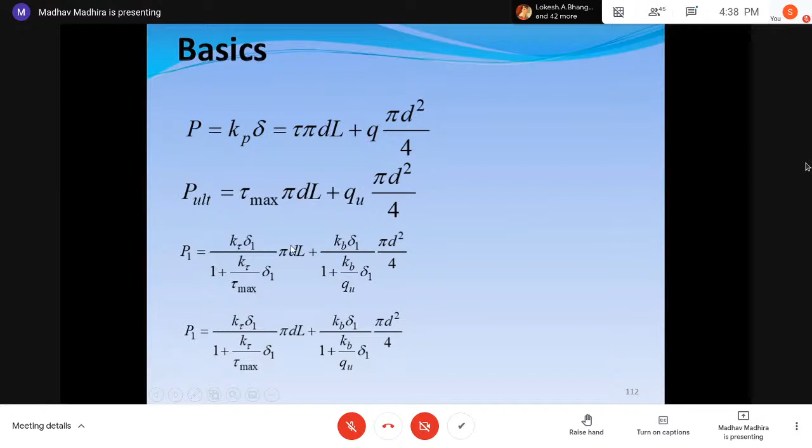And we write the simple equation. If I look at the pile, this is shaft resistance, tau into pi dl is shaft area, base load into base area, that gives me the ultimate load. At any displacement, this is the value. So I'll try to fit in the hyperbolic relation, and I measure at two displacements, the loads and the displacement, P1 and P2, I can get in terms of the analysis.

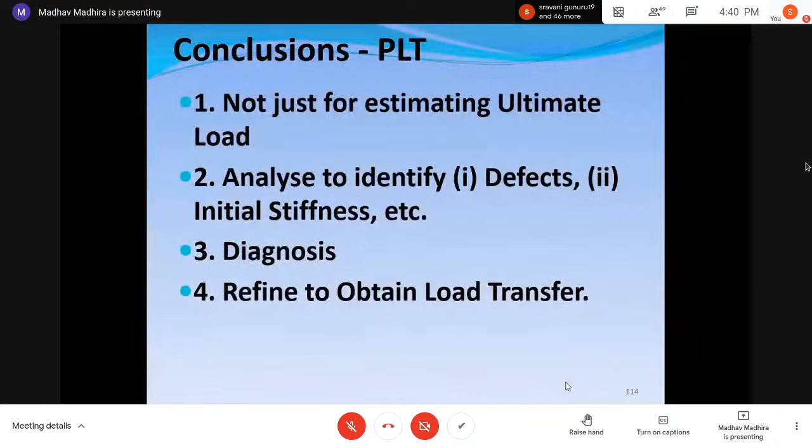So now I realize that if I just go by code, I may not be able to get the best of the lot. So what we have been trying to do now is not just estimate the ultimate load alone, but you can analyze the pile to identify the defects. You can get the initial stiffness, diagnose defects if there are any, and also get the load transfer. So what I want to share with you is that pile load test is not simply for getting allowable load, but you need to use it to get much more information than is possible.

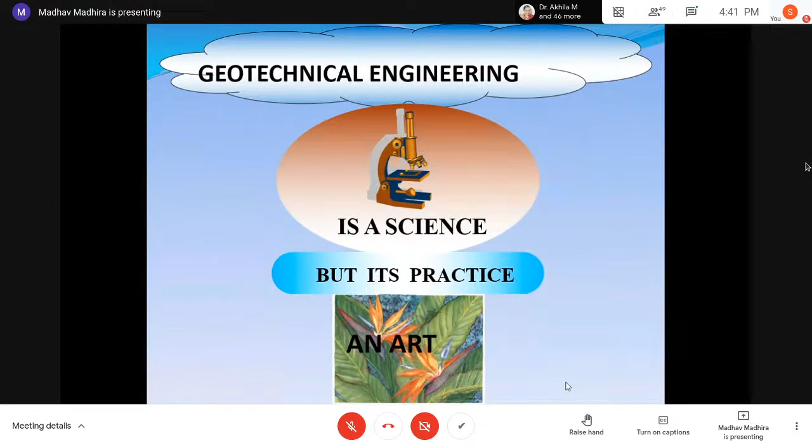Professor Reddy? Yeah. Sir. I would like to interact with the participants if they have any queries. There are hand raises, sir, from the participants. I think participants can unmute and interact with sir. I request the participants to raise their queries, or you may post your query in the chat box also. I can pose on your behalf.

I hope that the presentation is clear enough, sir, that you can apply most of it. And at any stage you want some clarification, please feel free to contact us too. We'll be able to share with you whatever we have.